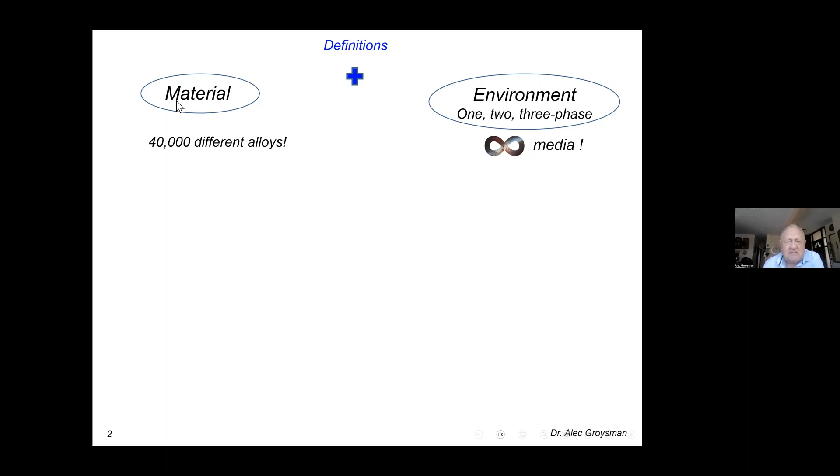Now we begin all times with definitions. Definition is very important for our philosophical approach to any subject, any item, any topic. What is corrosion? Corrosion is an interaction between material and the environment, which results in deterioration, degradation of both material and the environment.

We have about 40,000 different alloys, 85 metals, but environment maybe 1, 2, 3 phase, I think infinite number of media. And this interaction between material, mostly metal or alloy, will result in corrosion in abiotic environment. This means in soil, water, and air, and as a result will be environmental pollution.

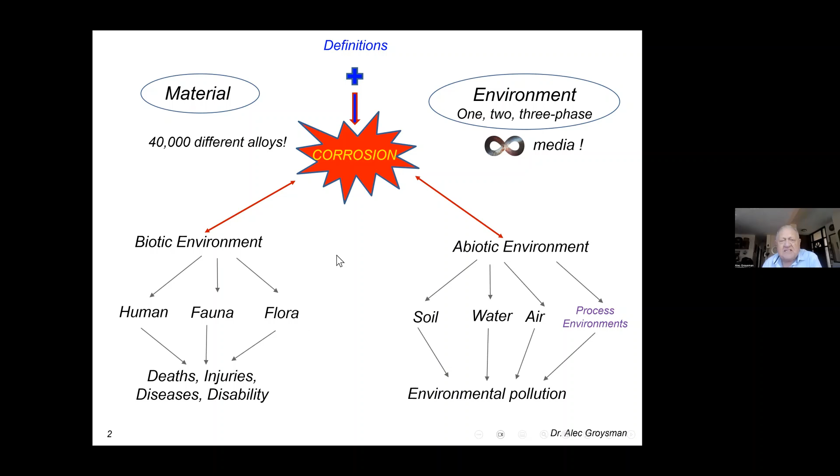But we are interested in process environment, in chemical industry. There is also biotic environment when corrosion influences human, fauna, flora, and this interaction may result in deaths, injuries, diseases, disability. And what is important is that microorganisms, both in biotic and abiotic environment, may also influence the appearance and occurring of corrosion.

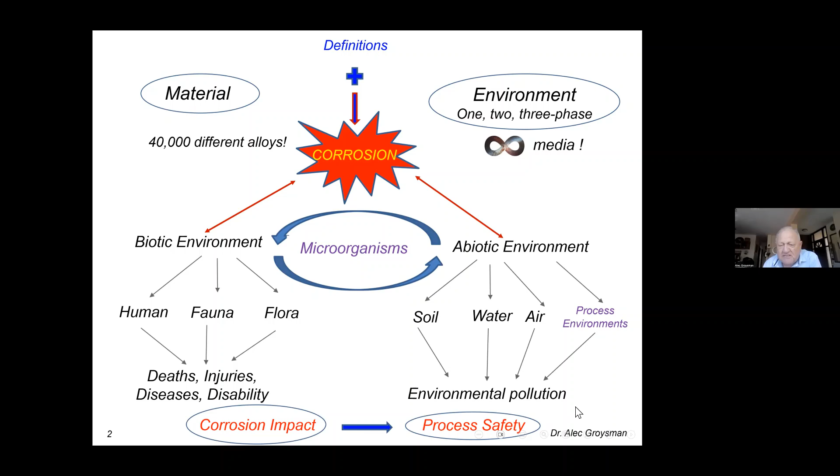Thus, corrosion impact may influence process safety, but we didn't give a definition to process safety. What is process safety? All pictures, as you see, are my pictures, my photos. Corrosion may result in fire, release of dangerous chemicals, mainly toxic chemicals, and explosions. These three phenomena are very important for process safety.

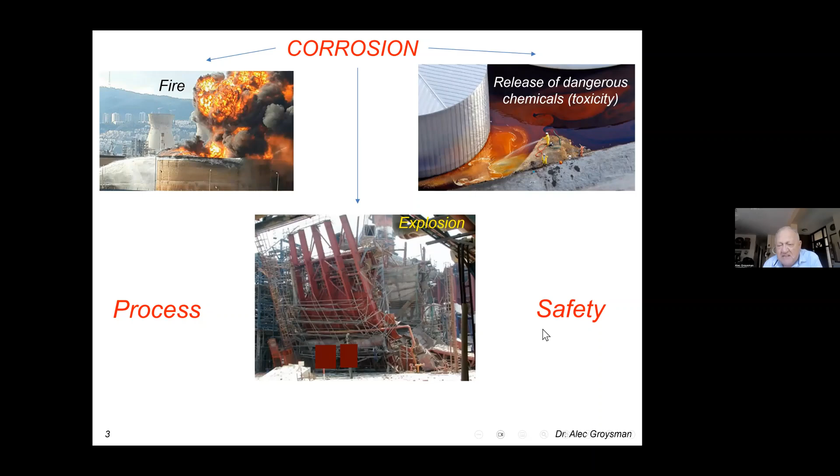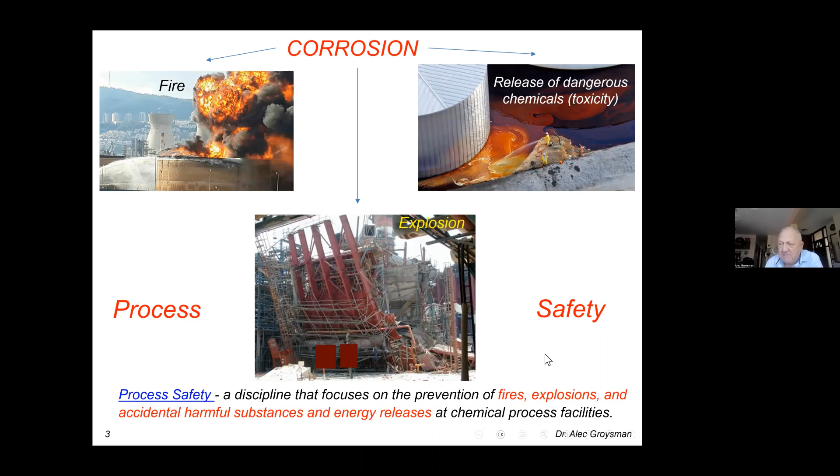Thus, process safety is a discipline that focuses on the prevention of fires, explosions, and accidental harmful substances and energy releases at chemical process facilities. Now, when we gave the definitions to our main phenomena, corrosion and process safety, we can continue to talk about process safety.

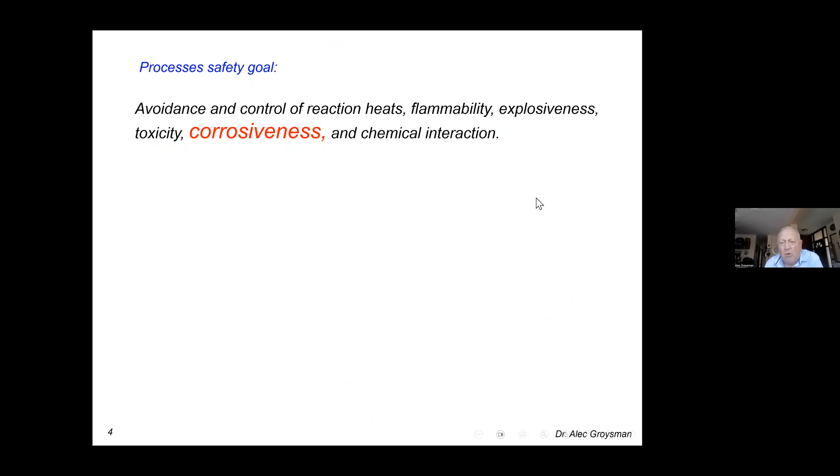And during the last 20 years, we deal with corrosion management. I understand that not all people, not all professionals deal with and know what it is. Corrosion management involves planning actions of selection, design, corrosion mitigation, prevention, monitoring, inspection, and prediction. And to follow process safety, suitable materials, design, mitigation measures, and corrosion monitoring methods must be used.

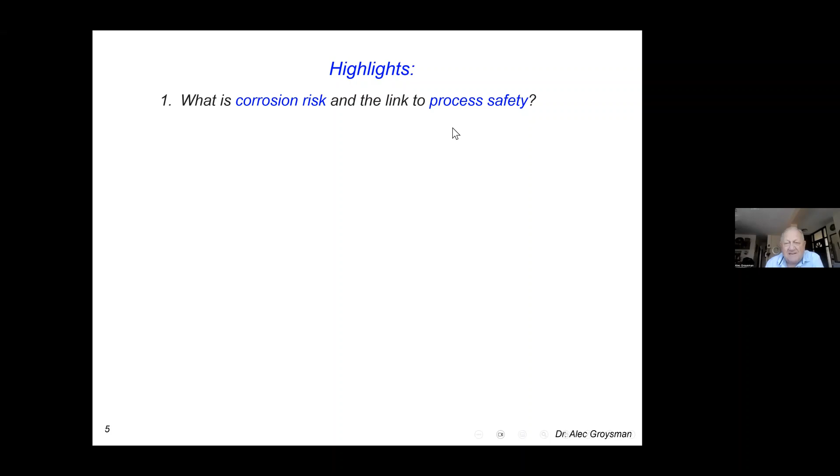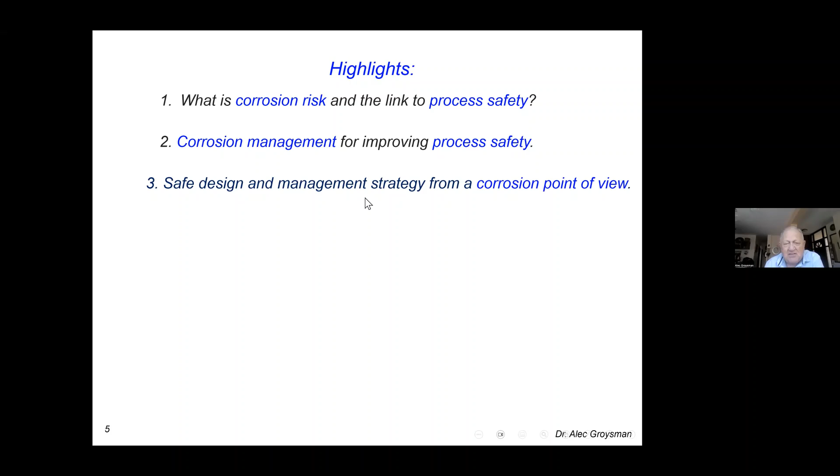Our highlights in my presentation, the first presentation, last day of conference, but this morning: the first topic will be what is corrosion risk and the link to process safety. The second point, corrosion management for improving process safety. The third point will be safe design and management strategy from a corrosion point of view. You see, we deal with corrosion and process safety.

Large failures because of corrosion occur once a week at chemical enterprises. I worked for oil refineries and petrochemical industry during 30 years. And I can say, based on my research and results, that at oil refineries and petrochemical plants, these corrosion events occur every 2-3 days. This means that during the year, about 140 corrosion events occur, and 30% of corrosion cases are not reported and registered at all.

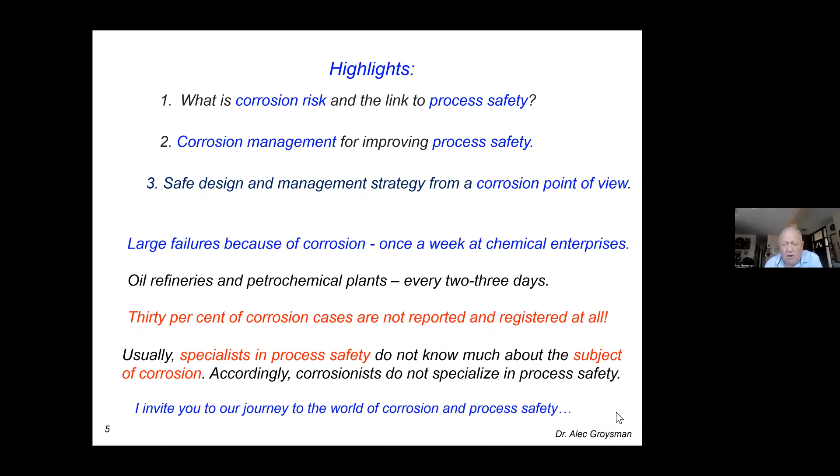Usually specialists, professionals in process safety do not know much about the subject of corrosion. Accordingly, corrosionists do not specialize in process safety. I invite you on our journey to the world of corrosion and process safety. Why is it important to learn corrosion? I teach corrosion courses in different universities in Haifa and Technion and in different universities over the world.

How did I teach up to the year 2000? The first important point, economics, that corrosion influences economics. Then the second, safety. Then environmental damage, reliability of different instruments, devices, heat exchangers, reactors, and so on. And the last, preservation of metal sources. Because instead of corrosion of metals and alloys, we should extract from the earth ores different metals such as molybdenum, iron, chromium, nickel, copper, zinc, and so on.

But after the year 2000, more than 20 years ago, 23 years ago, I saw that safety is the first and most important. Now I say that to learn corrosion, the first point is safety, then economics, environmental damage, reliability, preservation of metal sources. Safety now is valued over production, but corrosion, unfortunately, is not. Corrosion impact influences process safety.

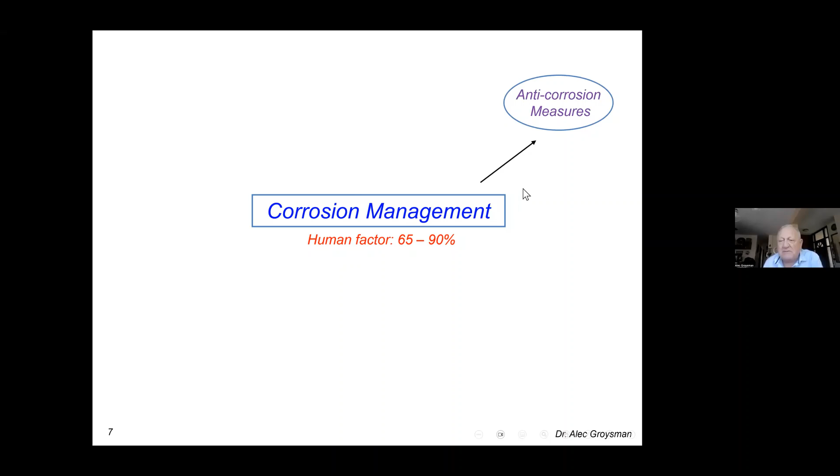And I would like to show my picture, my vision of corrosion management, that corrosion management consists of anti-corrosion measures, corrosion monitoring, knowledge transfer, and education. You see, I emphasized with red lines: knowledge transfer and education, study of each accident, communication, publication of minutes, management of change, maintenance, regular inspection, foreseeability, and human factor in corrosion management.

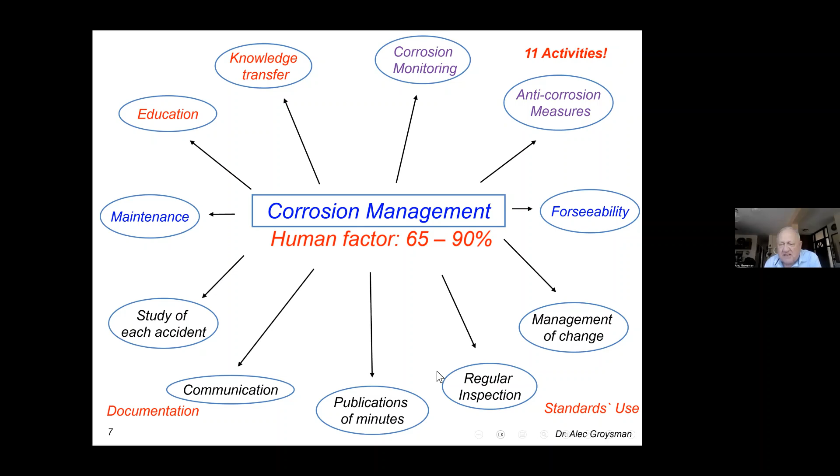In corrosion accidents, human factor occupies about 65 to 90%. This means we shall emphasize our education and knowledge transfer. Documentation and standards used are also included in corrosion management. Thus, all these 11 activities are introduced and occupy corrosion management. This corrosion subject is very interesting for our chemical industry and also for catalytic processes.

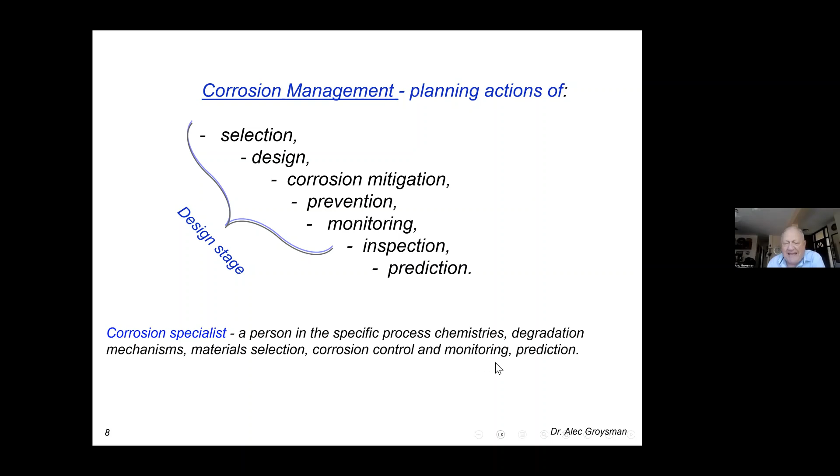Corrosion management involves planning actions of selection, design, corrosion mitigation, prevention, monitoring, inspection, and prediction. All these phenomena should be carried out during the design stage - this is very important. During design stage, we can select, design, plan corrosion mitigation measures, prevent, monitor, and so on. A corrosion professional specialist is a person skilled in specific process chemistries, degradation mechanisms, material selection, corrosion control, monitoring, and prediction.

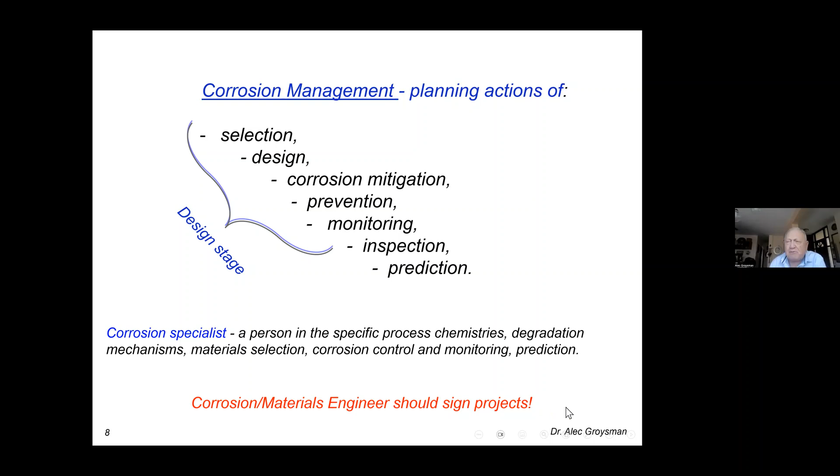I say during all my career that corrosion and materials engineers should sign any projects in chemical industry, especially in catalytic processes. Now I would like to show you 3 corrosion events.

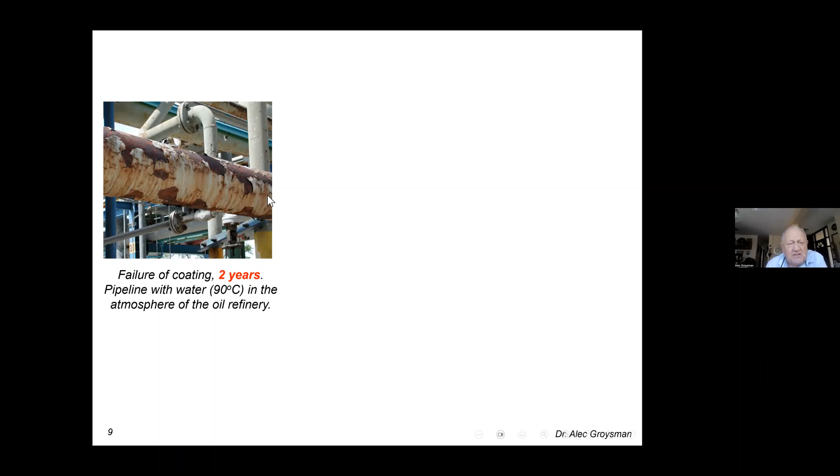The first event, failure of coating, as you see, during 2 years at oil refinery. Pipeline with hot water, 90 degrees centigrade, in the atmosphere of the oil refinery - the coating failed. These heat releases are important because workers and operators cannot go around this area.

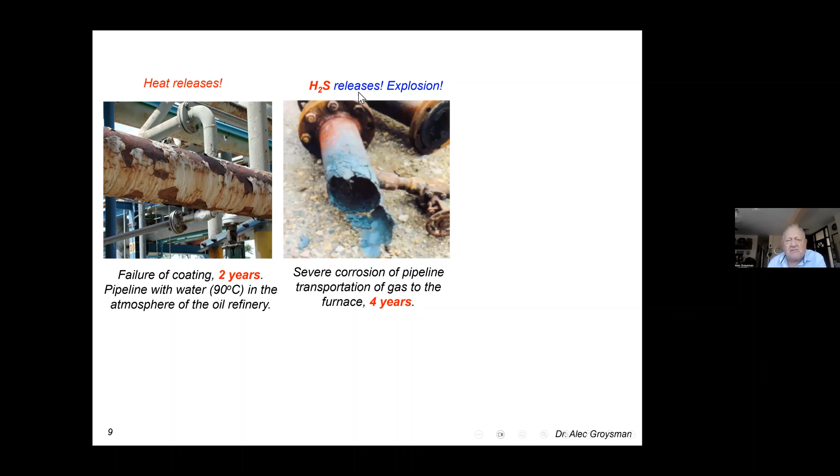The second event, corrosion event - you see severe corrosion of a pipeline transporting gas to the furnace after 4 years of exploitation and use. This corrosion occurs because of hydrogen sulfide releases, and an explosion occurred.

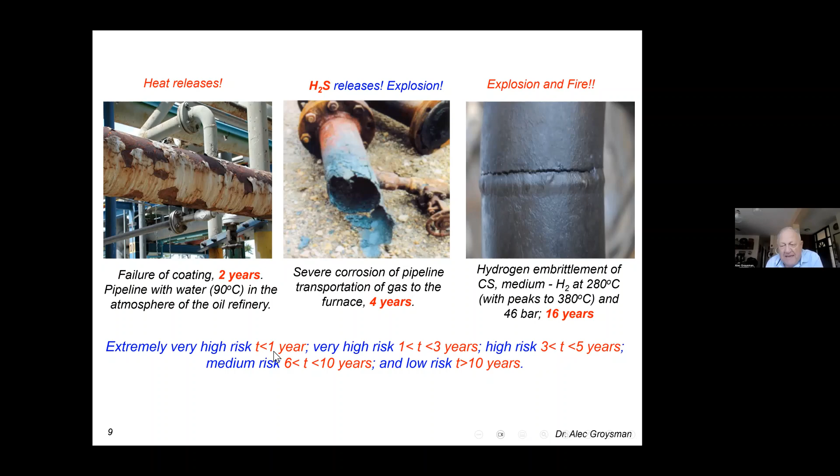As you see, after 2 years, 4 years, and 16 years - now I would like to emphasize my division that we can assess extremely high risk within 1 year of exploitation, very high risk between 1 and 3 years of service, high risk between 3 and 5 years, medium risk between 6 and 10 years, and low risk after more than 10 years. As you see, the first event was very high risk, and low risk here.

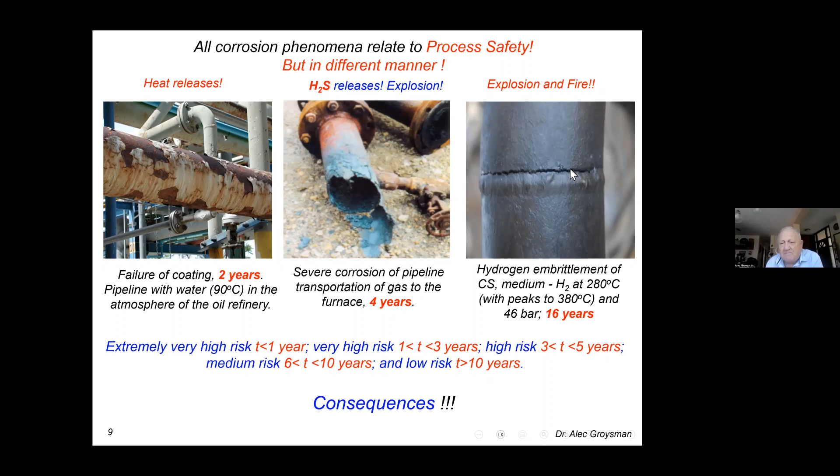All corrosion phenomena relate to process safety, but in different manner. What don't we see in this application, this assessment? We don't see consequences. The consequences we should understand and take into consideration. The consequences here are very low. This is not so low, but here, consequences after explosion and fire are very, very big.

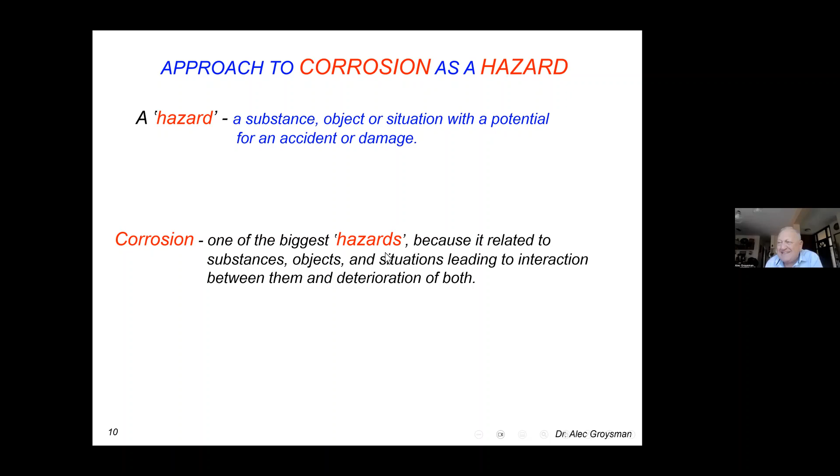Thus, we should approach corrosion as a hazard. What is a hazard? A hazard is a substance, object, or situation with the potential for an accident or damage. Corrosion is one of the biggest hazards because it's related to substances, objects, and situations leading to interaction between them and deterioration of both. I emphasize deterioration of both, because usually in different textbooks you read corrosion results in deterioration of metal, metallic construction, device - no, both, and environment also.

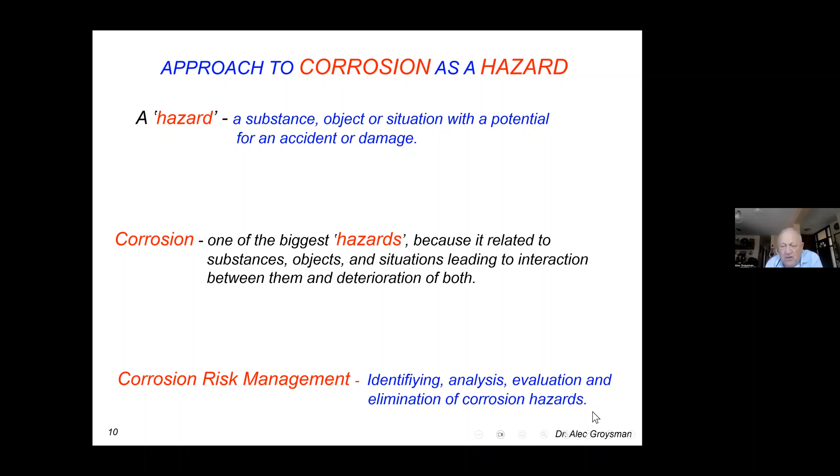Corrosion risk management is identifying, analysis, evaluation, and elimination of corrosion hazards. What should we do? Manage corrosion risk. Risk analysis came from the nuclear and chemical industries in the 60s and 70s of the 20th century. It was standardized and found wide application in corrosion management in the 90s of the 20th century, and now during the last 20 years we can talk about RBI, risk-based inspection.

Risk-based inspection is very important today because it takes into consideration two events. First, the probability of failure for individual equipment by examining the potential damage mechanisms - we can foresee, we can expect in any equipment in the chemical industry what type of corrosion can occur. Second, consequences of failure - how much it would cost if a particular equipment breaks down.

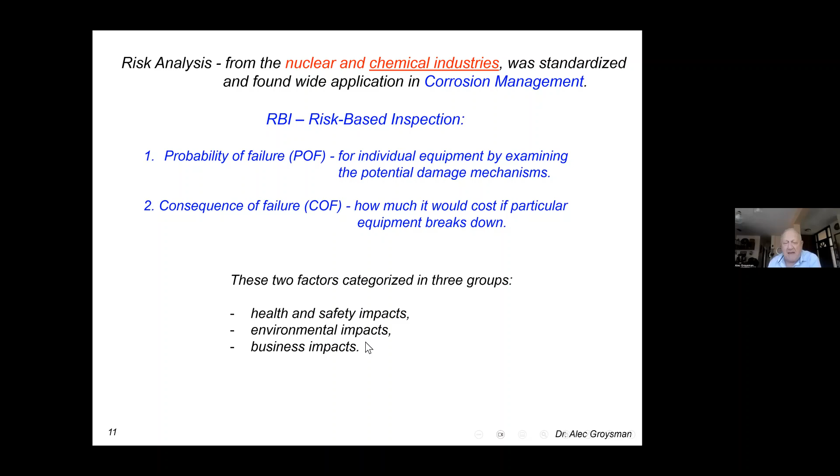These two factors are categorized into three groups: health and safety impacts, environmental impacts, and business impacts. Thus, risk is the multiplication of probability and consequences. It's not easy to calculate, but there are too big, too large...

...documents that were developed by the American Petroleum Institute, API, and they began developing these documents in 1993. The API Recommended Practice 580, Risk-Based Inspection, where you may read about definitions and concepts on 94 pages, is focused on loss of containment of pressurized equipment due to material deterioration.

These risks are managed through inspection. And the second one, Recommended Practice API 581, Risk-Based Inspection Technology - this implements the methodology on 652 pages.

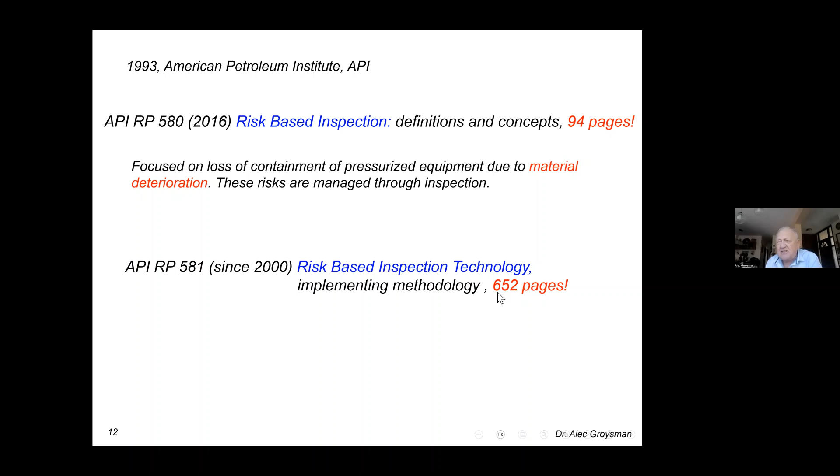652 pages. Yes, I laugh because this is who can read. Yes, but in any case, people work with this document.

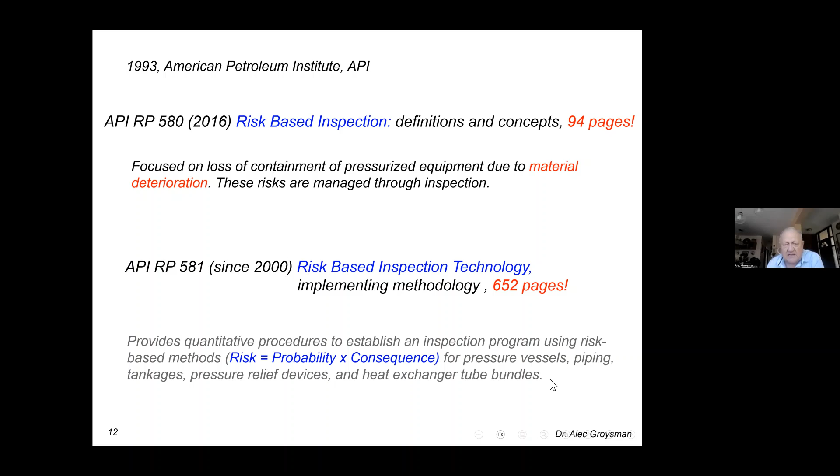This standard provides quantitative procedures to establish an inspection program using risk-based methods, meaning risk as multiplication of probability and consequence for pressure vessels, piping, tankages, pressure relief devices, heat exchanger tube bundles. Shortly, all devices at our chemical industry. How can we determine corrosion risk?

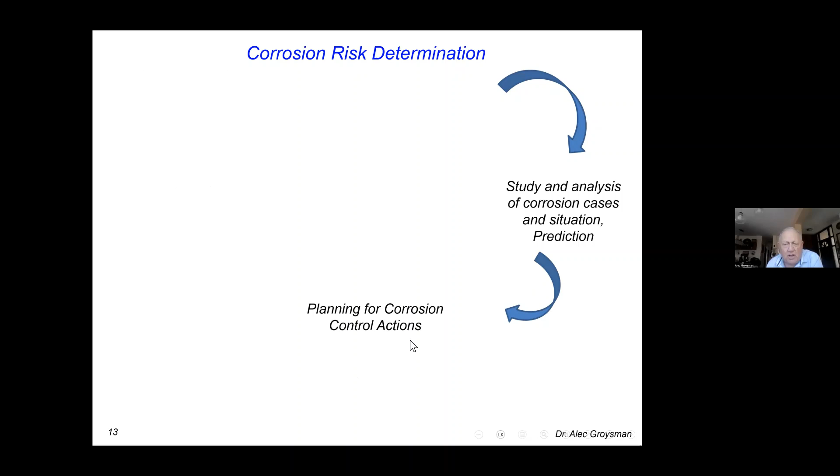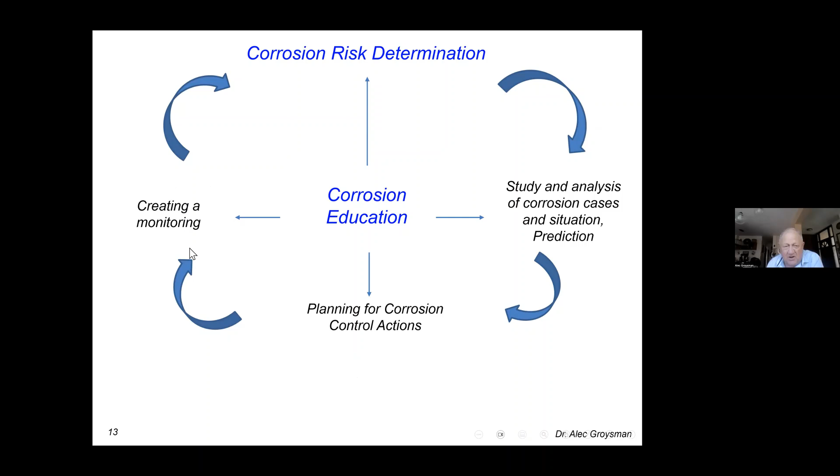First, we should study and analyze corrosion cases and situations. We can predict this. Thus, after this, we can plan for corrosion control actions and then create monitoring. You see all these events, all these phenomena, all these activities are based on our corrosion education. Without corrosion education, we cannot use all these approaches.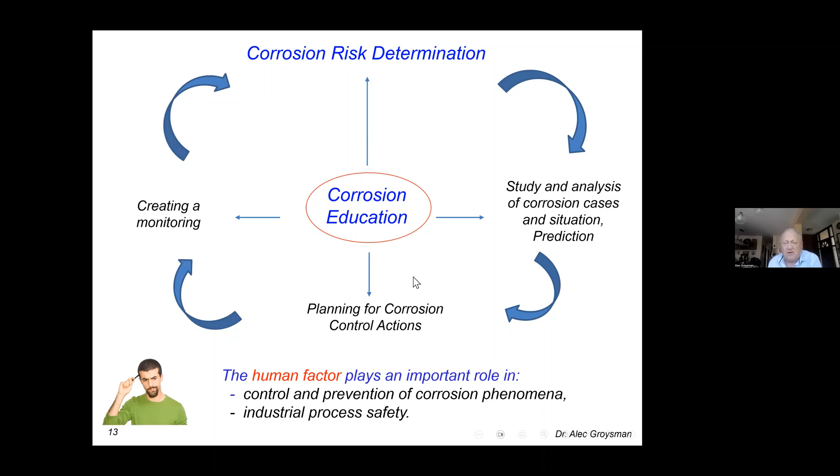And the human factor plays an important role in control and prevention of corrosion phenomena, both in industrial process safety. As I understand, and I say several times during my presentation that human factor is important. Thus, corrosion education is the first topic that we should do, we should apply.

Three causes of accidents. I can suggest to you what are the three causes of accidents. Because I didn't know, I didn't think, I did not see. Once again, education and culture is important. Yes, and teaching.

Thus, I would like to show you environments in the chemical industry. This is a very wide environment, from chemicals and different compositions of solids, liquids, gases, 1, 2, 3 phases with different pH from alkali to acidic, natural gases, and by red, I emphasize by red color, all these impurities that influence corrosion.

Then crude oil also with impurities of water, hydrogen sulfide, salts, microorganisms, petroleum products, fuels, biofuels, then cooling water and aqueous solutions at any chemical enterprise, processed gases with CO2, hydrogen sulfide, ammonia, oxygen, and steam, organic solvents, solutions, and reagents, and of course, atmosphere, soil, and concrete that we use at every chemical enterprise.

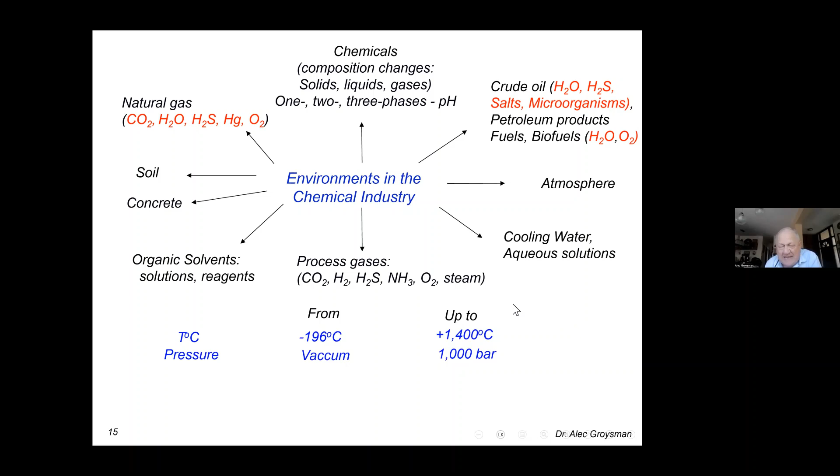Temperature may be from minus 200 degrees centigrade up to 1,400 degrees, and pressure from vacuum to 1,000 bar.

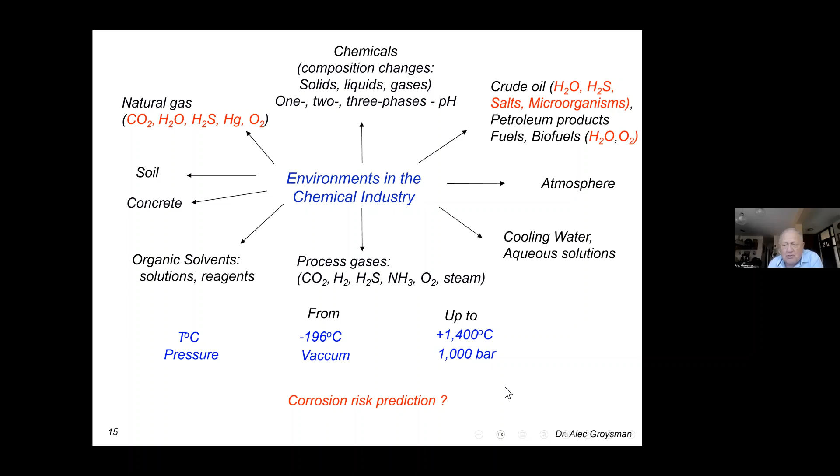How can we predict corrosion risk? Once again, when we see the SDS, previously MSDS, safety data sheets, for every hazardous substance, we may read about flammable, explosive, oxidizing, corrosive, and gases under pressure.

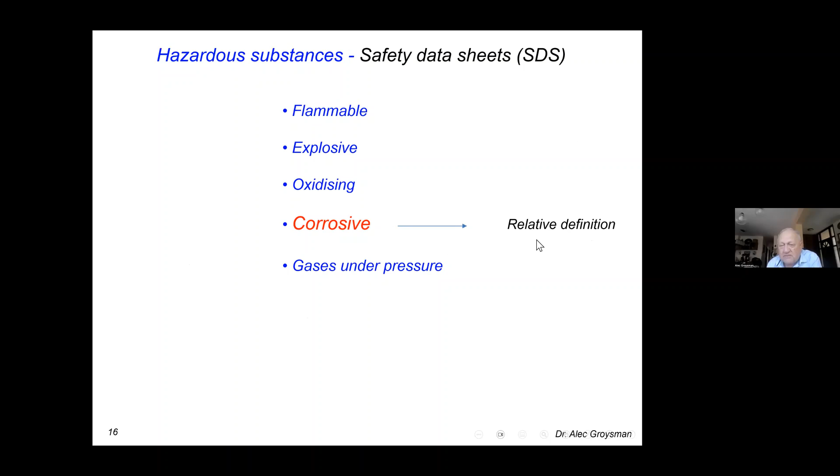What does corrosive mean? I can say that it is not well defined, because corrosive is a relative definition. For example, ammonia - you may read in SDS, corrosive. No, for iron it is protective. It is corrosion for copper, very aggressive. That's corrosion connected to philosophy.

And how can we assess corrosion? Using corrosion modeling today is very important to deal with. The purpose of identification is identifying the corrosion hazards, by defining the corrosion type, mechanism, and expected corrosion rate without mitigation measures.

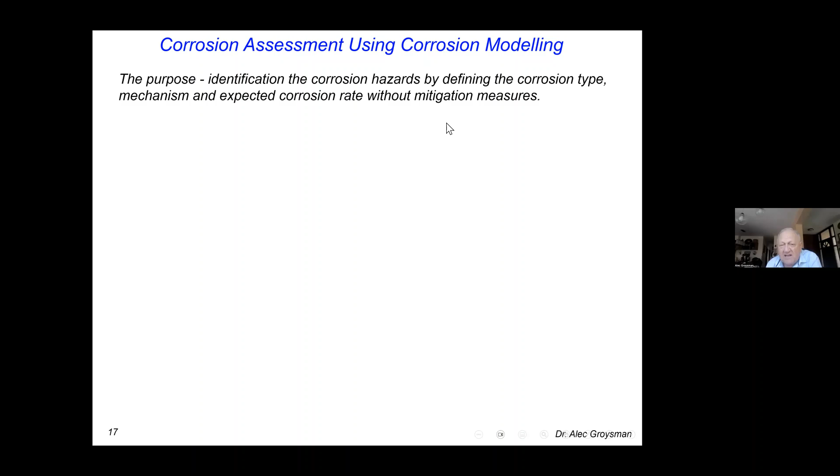I stress without. As we see, corrosion may result and may be general in acidic and alkaline environment, and may be localized, about 15 types.

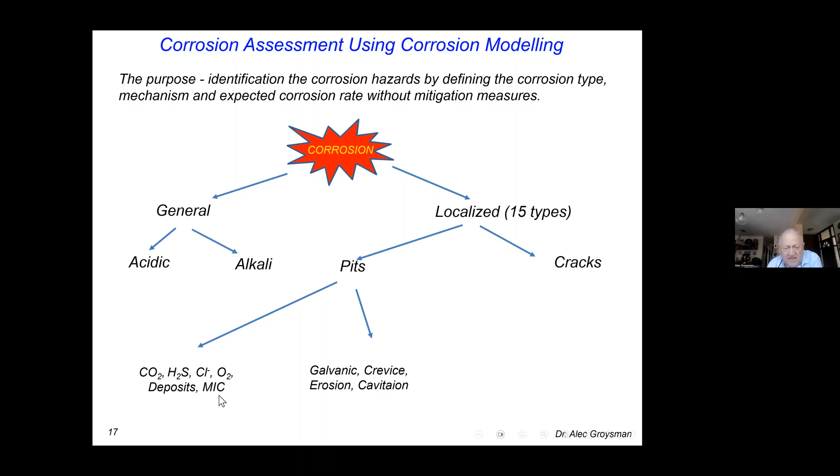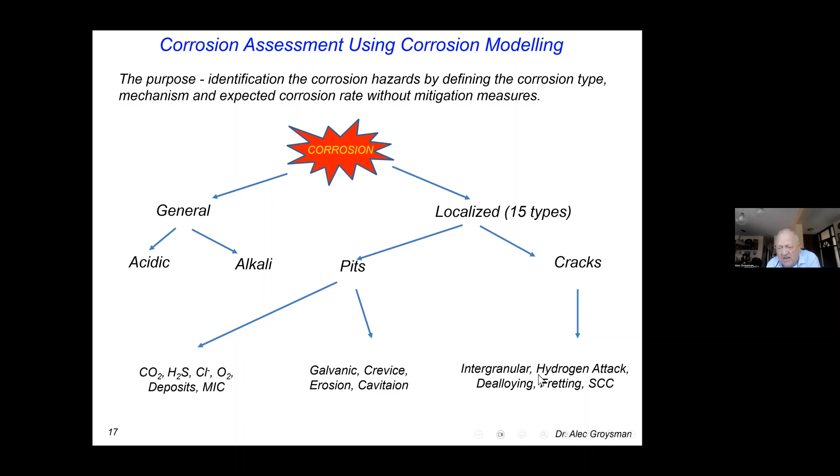This localized corrosion can result in pits and cracks, and pits may be a result of CO2, hydrogen sulfide, chlorides, oxygen deposits. microbiologically influenced corrosion, and may be a result of galvanic, crevice, erosion, cavitation. Cracks may be a result of intergranular, hydrogen attack, dealloying, fretting, stress corrosion cracking.

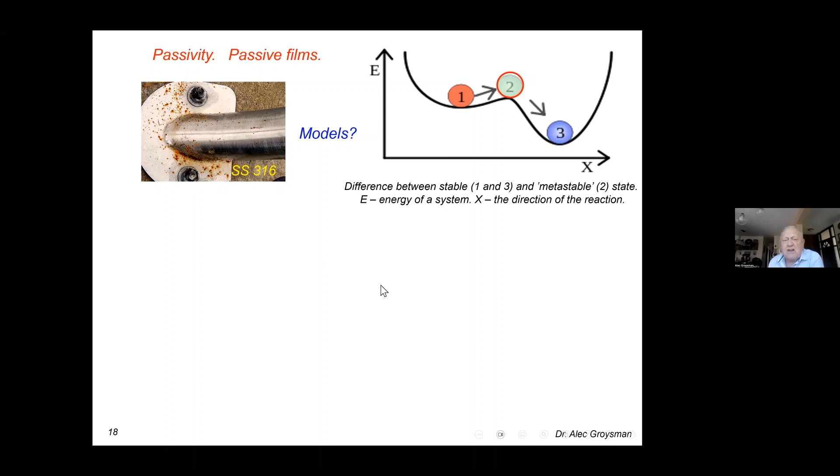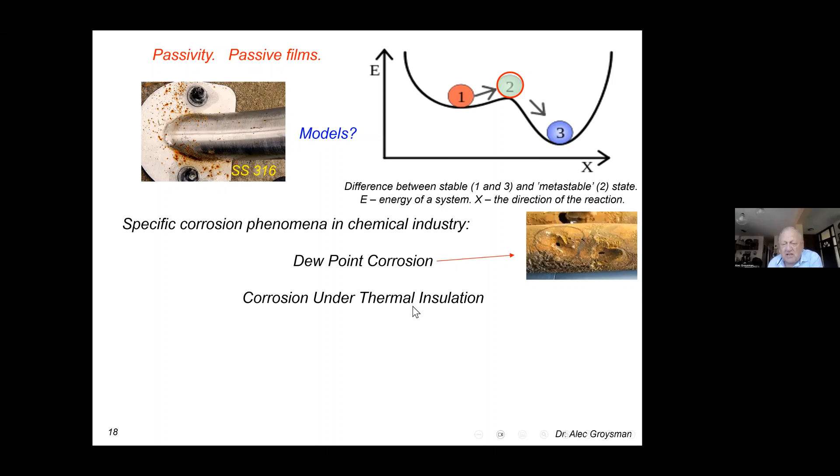How can we build or create these models? And what can we say about specific corrosion phenomena in chemical industry? Dew point corrosion and corrosion under thermal insulation - this is very complicated, and it's not easy to describe with such models. What about fouling? Yes, and this also results in corrosion.

The next step in corrosion assessment is to define corrosion mitigation strategy and predict corrosion rate of protected equipment. Thus, you see that predicting corrosion and creating corrosion models is not easy for each process.

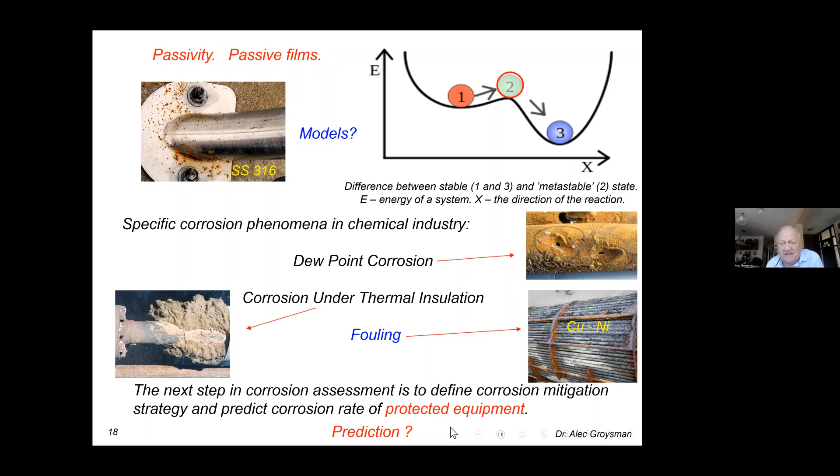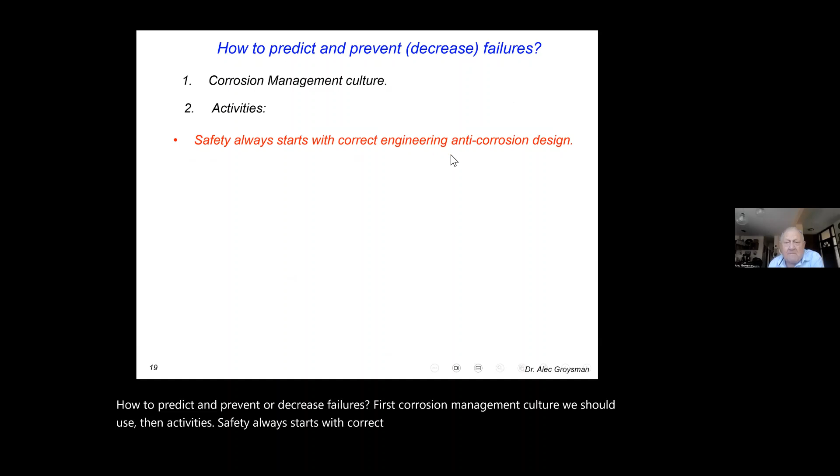Our aim is to predict corrosion in chemical industry. How to predict and prevent or decrease failures? First, corrosion management culture we should use. Then activities - safety always starts with correct engineering and anti-corrosion design.

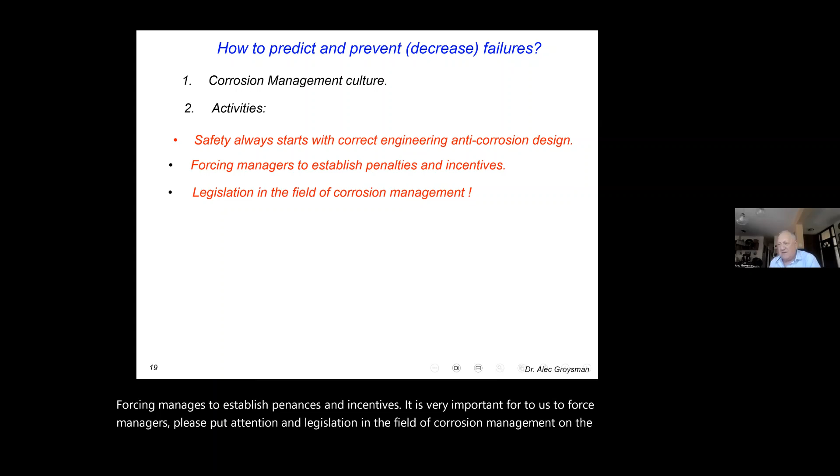Forcing managers to establish penalties and incentives - it is very important for us to force managers, please put attention, and legislation in the field of corrosion management on the governmental level, on the federal level in each country, searching how chaotic corrosion processes result in failure.

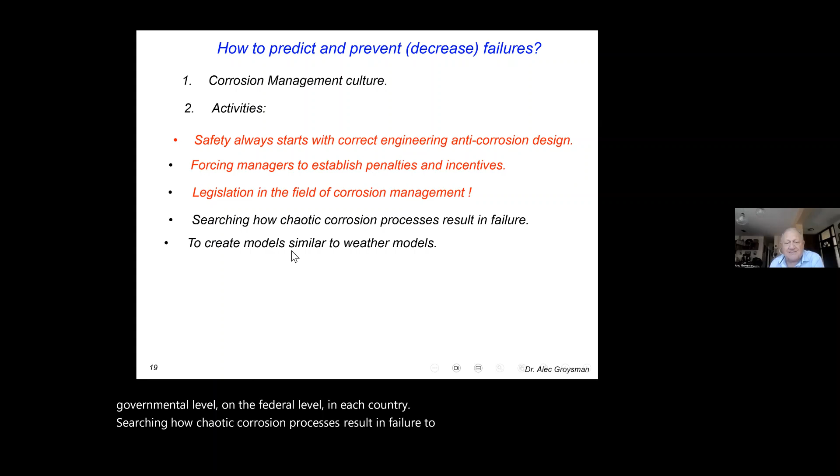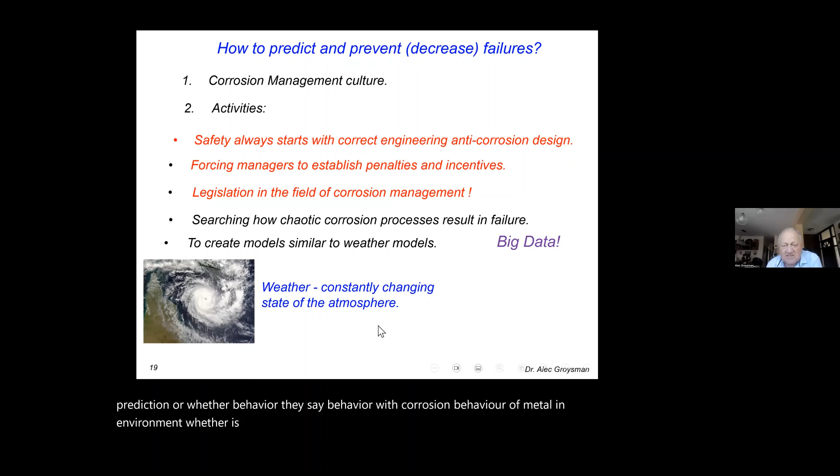To create models similar to weather models, using big data. What is weather? I compare prediction of weather behavior with corrosion behavior of metal in environment. Weather is a constantly changing state of the atmosphere, and corrosion is also a constantly changing state of a metal-environment system.

I deal with physicists and people who predict weather. We can predict only for several days. Thus, we can predict corrosion now, also for short periods, not for long periods. Degree of uncertainty will remain even when we create good corrosion models.

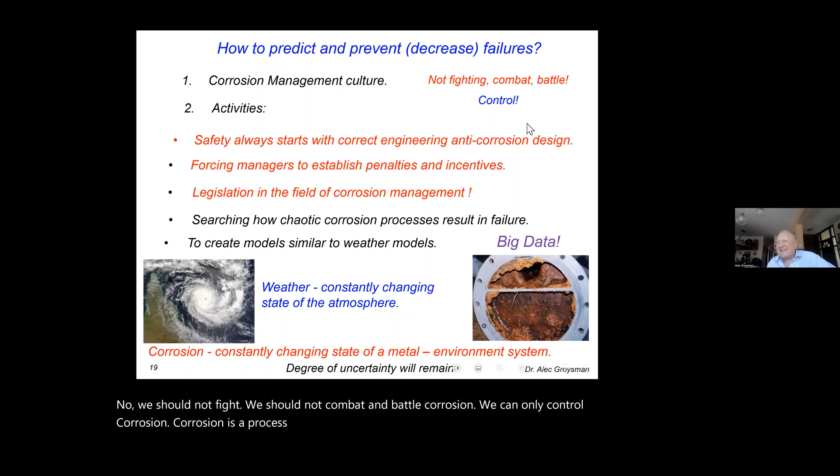Not fighting - I'd like to emphasize also that many people who do not deal with corrosion say that we fight, we combat, we battle corrosion. No, we should not fight. We should not combat and battle corrosion. We can only control corrosion. Corrosion is a process according to the second law of thermodynamics.

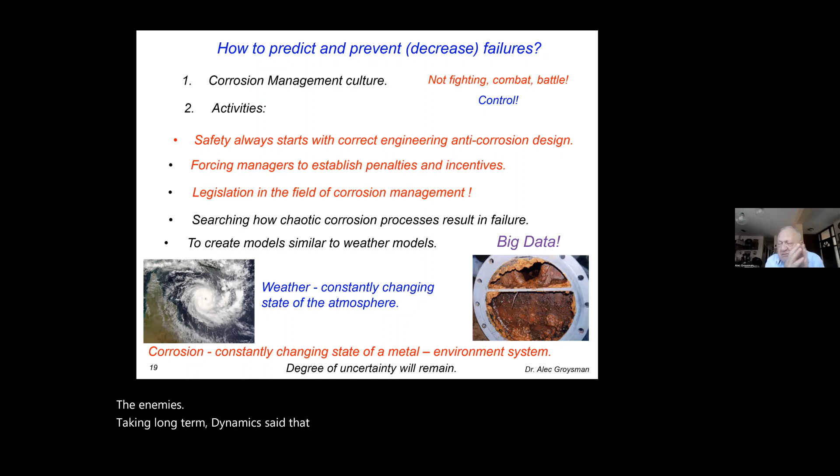The second law of thermodynamics said that entropy increases all the time. We cannot prevent the second law. Thus, we can only control, not fight, not combat.

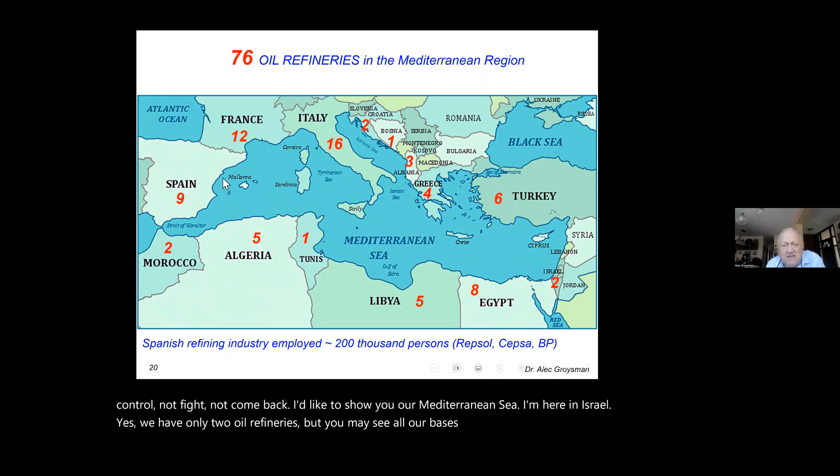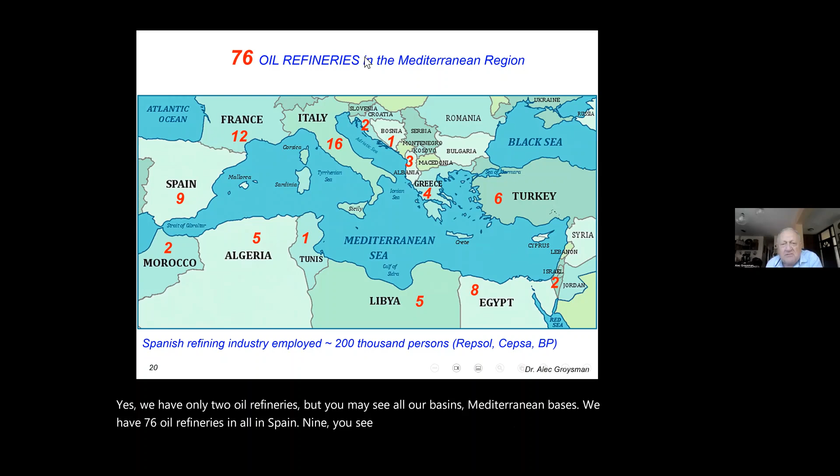I'd like to show you our Mediterranean Sea. I'm here in Israel. We have only 2 oil refineries, but you may see all our basins, Mediterranean basins. We have 76 oil refineries, only in Spain 9. You see, around these basins. And the Mediterranean oil and gas map, you may see in Spain, Italy, Greece, Israel, Turkey here, Egypt, Tunis, and Libya.

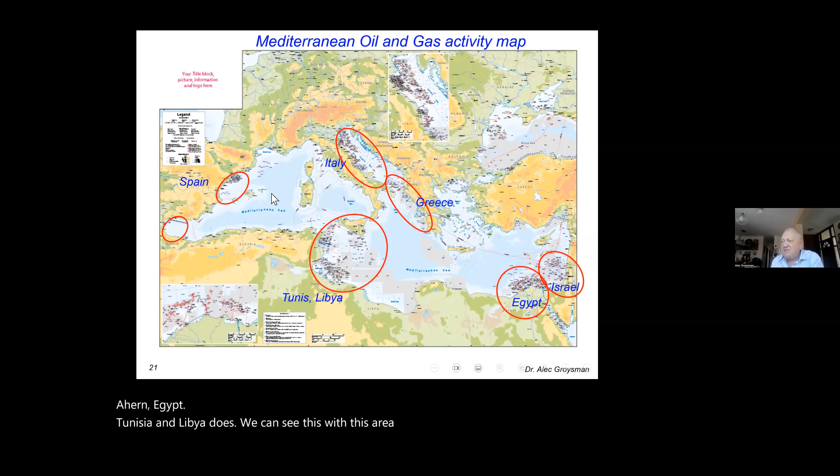Thus, we can say this area, Mediterranean area, is very dangerous from the process safety and corrosion standpoint, because corrosion influences process safety, and we should put attention and teach corrosion process safety professionals about corrosion phenomena.

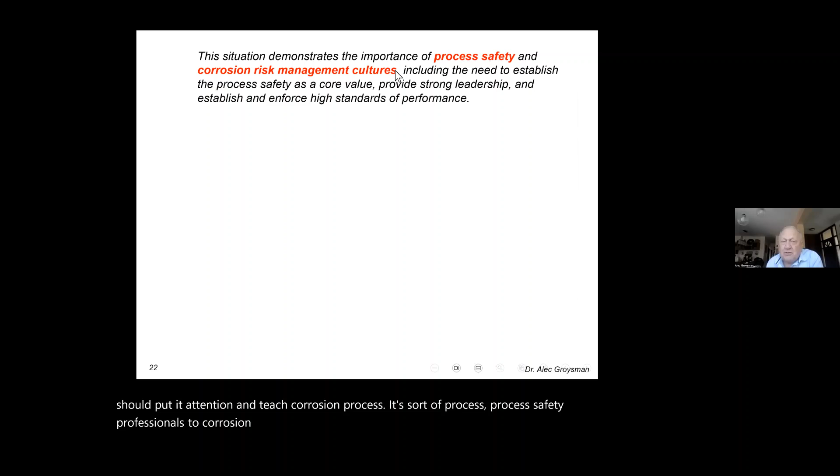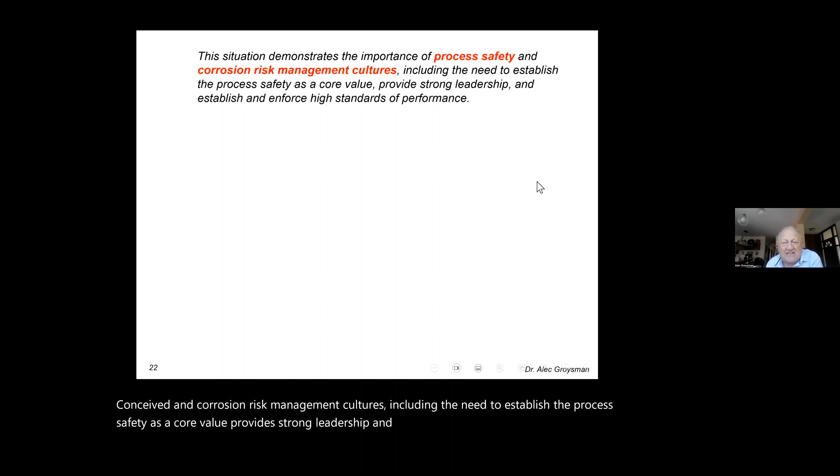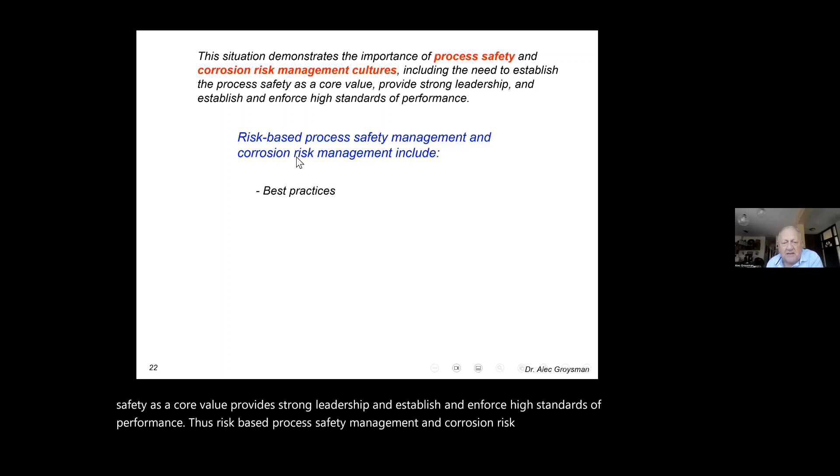This situation demonstrates the importance of process safety and corrosion risk management cultures, including the need to establish process safety as a core value, provide strong leadership, and establish and enforce high standards of performance. Thus, risk-based process safety management and corrosion risk management include best practices, process safety and corrosion training, incident investigations, process hazard analysis including corrosion, and process safety and corrosion risk management audits.

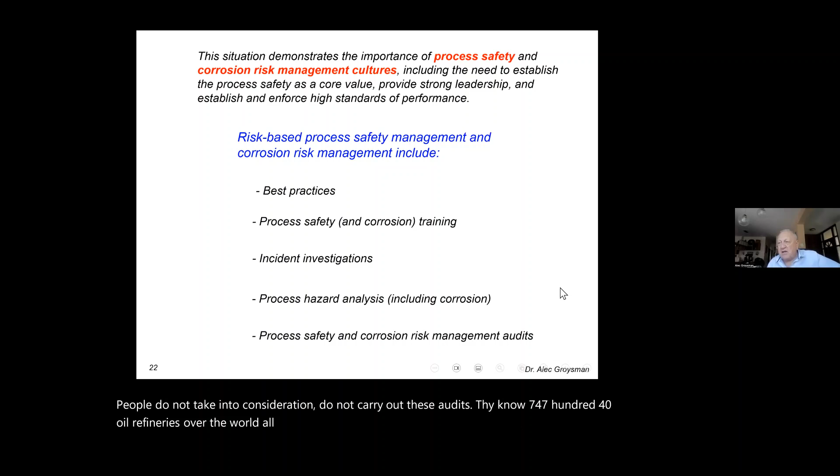People do not take into consideration, do not carry out these audits. I know 740 oil refineries over the world, only in Europe about 200 oil refineries, and not even these carry out these audits.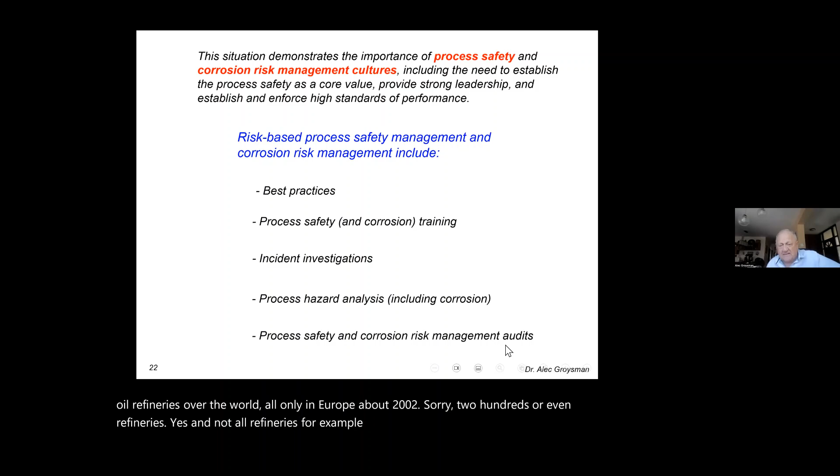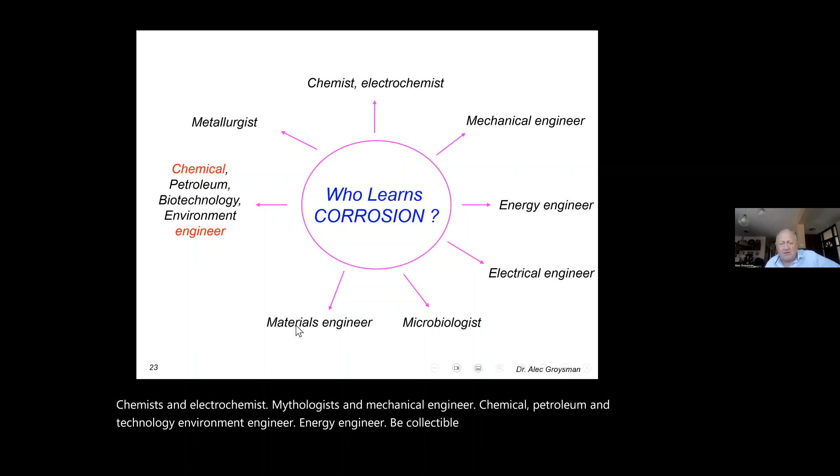Who learns corrosion today? Chemists and electrochemists, metallurgists and mechanical engineers, chemical, petroleum, biotechnology, environment engineers, energy engineers, electrical engineers, microbiologists, materials engineers. This corrosion subject discipline is interdisciplinary studies we should attain.

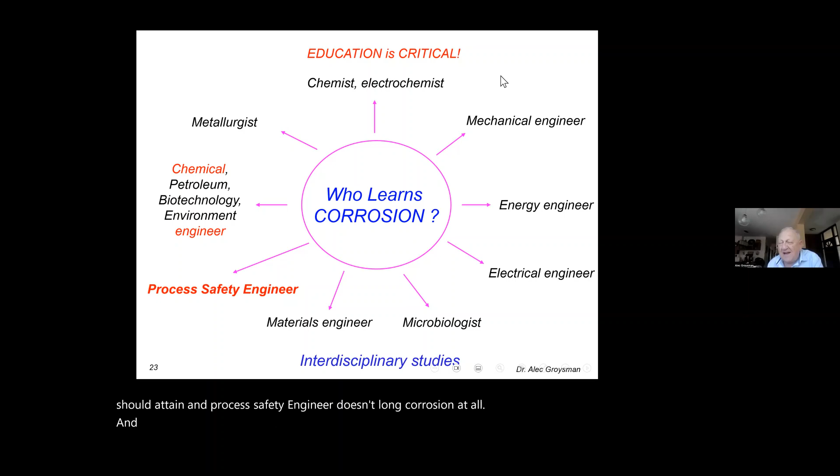And process safety engineers do not learn corrosion at all. Education is critical, I say this all the time. And education and knowledge transfer - about 75% of all corrosion failures happen because of insufficient information, communication, interaction, and knowledge.

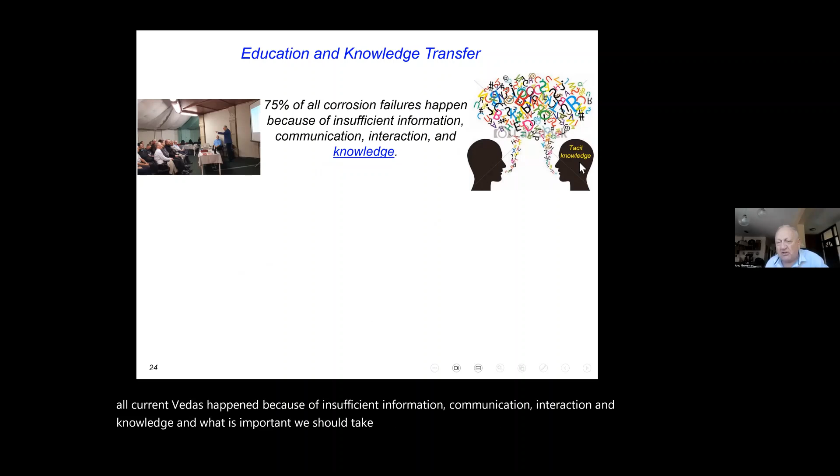And what is important, we should extract tacit knowledge. We have two types of knowledge. This is general knowledge that you may find in different libraries, in books, in magazines and journals, but we have tacit knowledge. This is only in the heads of our professionals, and we should extract it. We do not do this.

Give pedagogical skills to scientists and engineers to be a teacher. When young people, engineers and scientists begin to teach, not every scientist and engineer can teach. We should give them training in how to teach, pedagogical skills, and improve corrosion education among all categories of workforce,

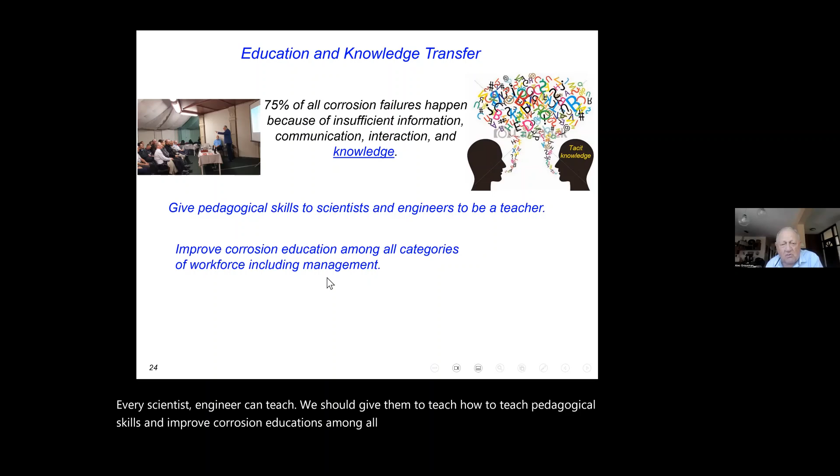including management. Give a man a fish and you feed him for a day. Teach a man to fish and you feed him for a lifetime. These are the words of Maimonides, Rambam, a Jewish philosopher who lived in Spain 1,000 years ago. This is his monument in Cordoba.

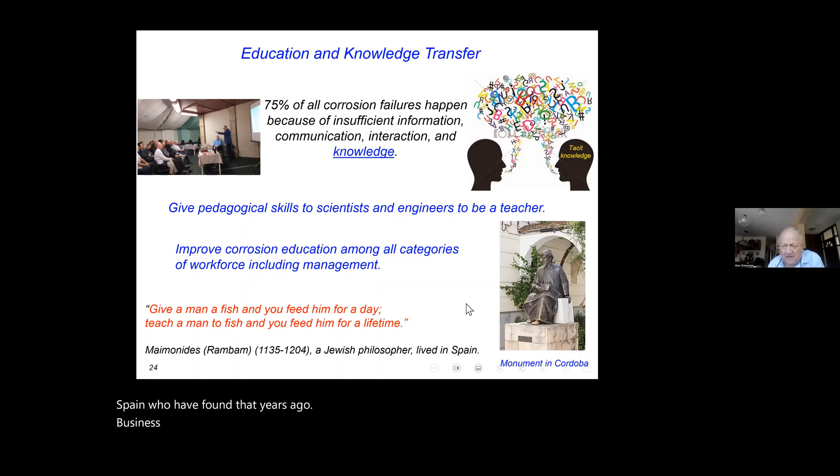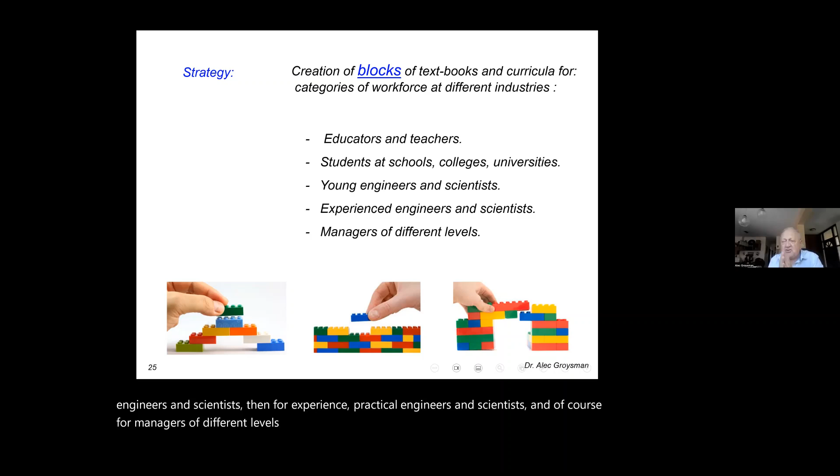I was there. And now our strategy is creation of blocks of textbooks and curricula for categories of workforce in different industries. First, for educators and teachers, then for students at schools, colleges, and universities. Third, for young engineers and scientists, then for experienced practical engineers and scientists, and of course, for managers of different levels.

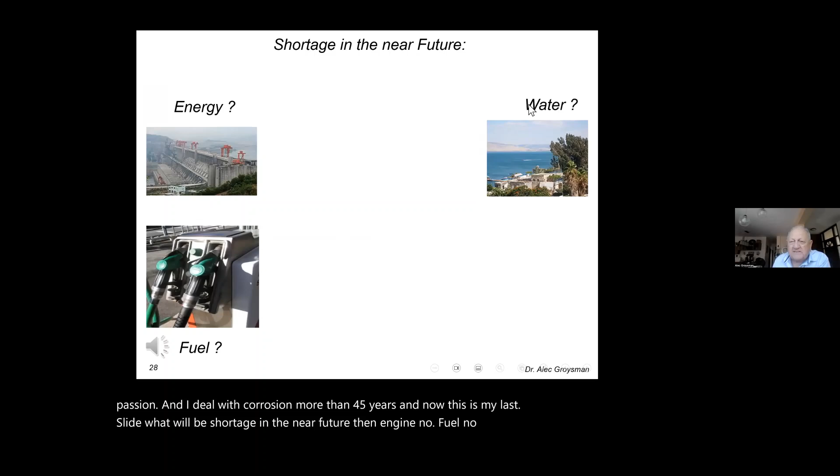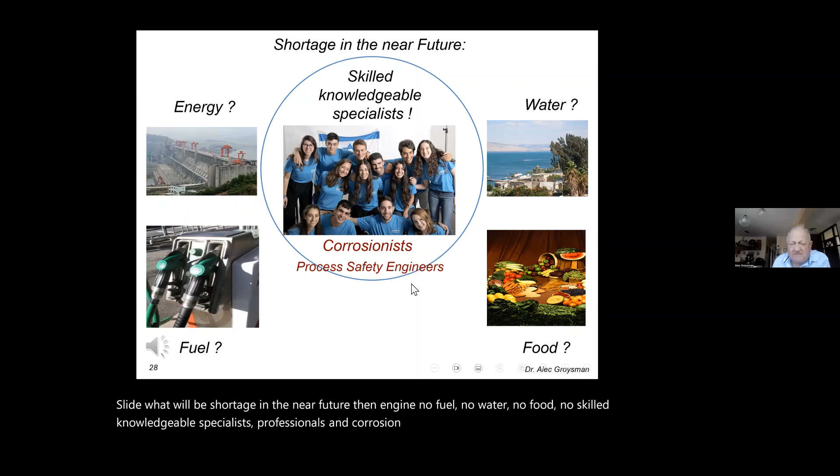slide. What will be in shortage in the near future? Energy? No. Fuel? No. Water? No. Food? No. Skilled, knowledgeable specialists, professionals, and corrosionists and process safety engineers among them. Therefore, I trust in Rust.

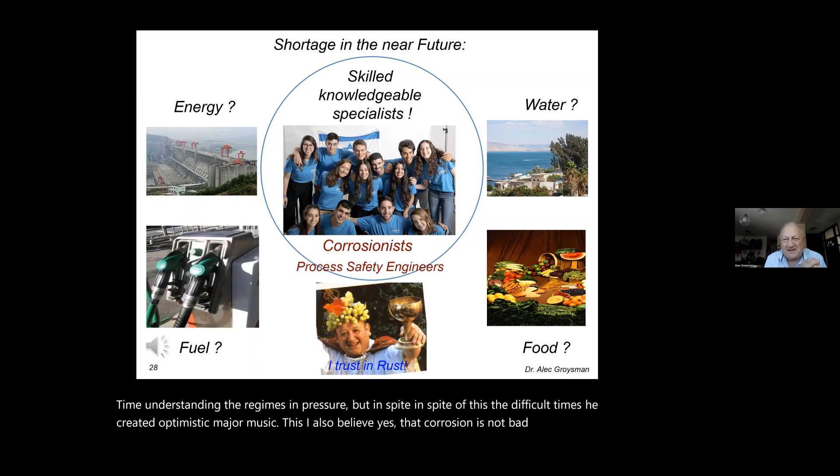This I also believe - that corrosion is not a bad, nasty phenomenon. We can deal with and control corrosion to improve process safety in the chemical industry. Thank you for your attention.

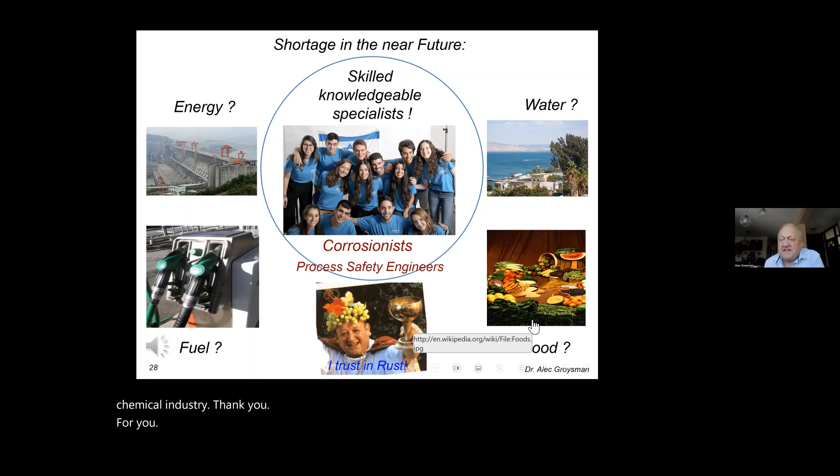Sarita, Delia, where are you? I finished my presentation. Are there any questions?